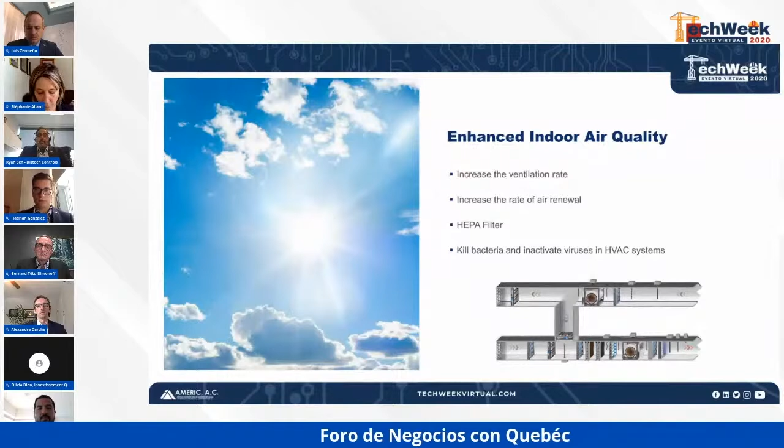Now that we know what can be done to ensure proper indoor air quality, let's see how we can manage spaces better. With the advent of remote working in the wake of the pandemic, offices shared by several employees could become the norm for open spaces, especially in cities where rent is expensive and space is scarce. Indeed, why rent, cool, and clean a space that can accommodate all employees if they're teleworking 2 or 3 days a week? However, these shared spaces represent a real challenge in terms of disinfection and cleaning.

In order to assure each employee that they are not at risk of being contaminated by the previous occupant of a shared space, room and desk presence detectors record in real time if a space or desk is occupied and allow facility managers to keep a record of occupancy over time. This lets them know the occupancy rate of the building dynamically, and allows them to prioritize a plan for offices and spaces to be disinfected first.

As we've just seen, occupancy sensors make it possible to select the spaces to be disinfected as a priority, in order to offer the healthiest and most trustworthy spaces. But once these spaces are identified, there are two methods to ensure disinfection of surfaces. The first, of course, is to use a cleaning team with the right products and methodology, who will come in to disinfect the previously occupied workspace with the appropriate detergents and germicide.

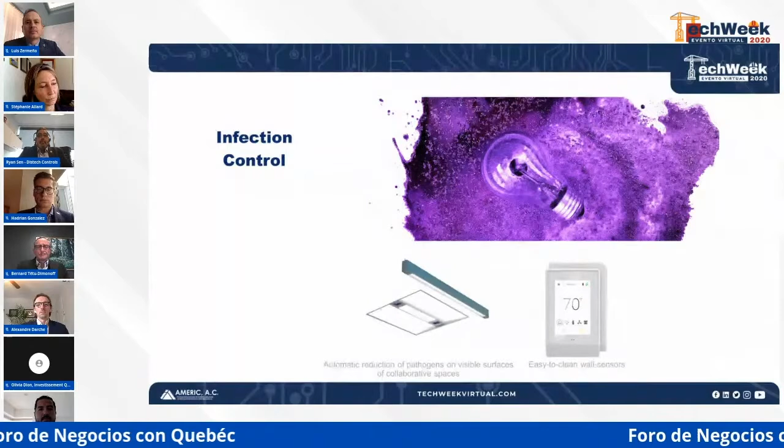When it comes to comfort management today, individuals are reluctant to touch door handles, let alone the thermostat on the wall. However, what could be more personal and trusted than your own mobile phone? With some of the latest technology available through Distech Controls, you no longer need to touch the equipment on the wall to personalize your comfort. Everything can be done securely from your personal phone.

The My Personify app from Distech, for instance, can manage all of the comfort of a room from a single application, one that's available free of charge, and includes the ability to adjust room temperature, lighting levels, sunshade position, and even allows you to select predefined scenarios, such as video projection mode in a conference or meeting room.

The My Personify Workplace app is another application available from Distech Controls, which offers all of the services to simplify the life of an office worker, such as comfort management as discussed, but also indoor positioning, wayfinding, room reservation, social networks, company news, as well as an easy-to-access catalog of services offered to the occupants in that building.

It allows you to limit and optimize travel within a building to avoid certain areas when moving from one place to another. It also makes it possible to reserve meeting rooms from an employee's phone, thus avoiding the need to touch the screen sometimes found in front of meeting rooms to reserve it for a specific time.

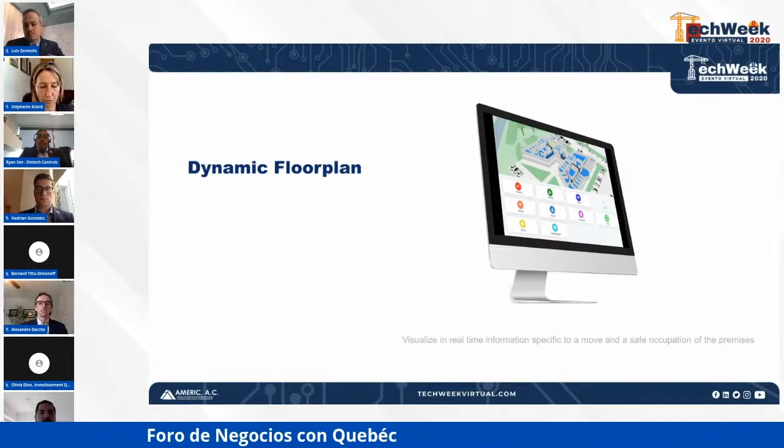And so we've looked at all of these proactive and reactive measures, and you probably ask yourself, well, has anyone actually been able to deploy these technologies in a commercial building to make them healthy and trustworthy for the occupants? In fact, Distech Controls is quite proud to support many institutional end user customers, property developers, and owners from all over the world in deploying such solutions on a daily basis.

Here you can see an assortment of projects that we've done around the globe, with many more available for reference on our website. However, in the context of the local Mexican market, I wanted to highlight a specific project executed in the region. One of our local and trusted system integrator partners, EMBA Group in Mexico, was able to assist Jabil with a key manufacturing facility of theirs in Guadalajara by deploying our technology, not only to make the facility more healthy and trustworthy, but also to provide energy savings.

Since inception, estimates show upwards of 30% savings on utility spend through local energy monitoring and verification. Due to this success, Jabil has actually entrusted the Distech technology to be deployed in 6 of their 12 facilities across Mexico to date, and are planning to retrofit the remaining facilities over the next 3 years.

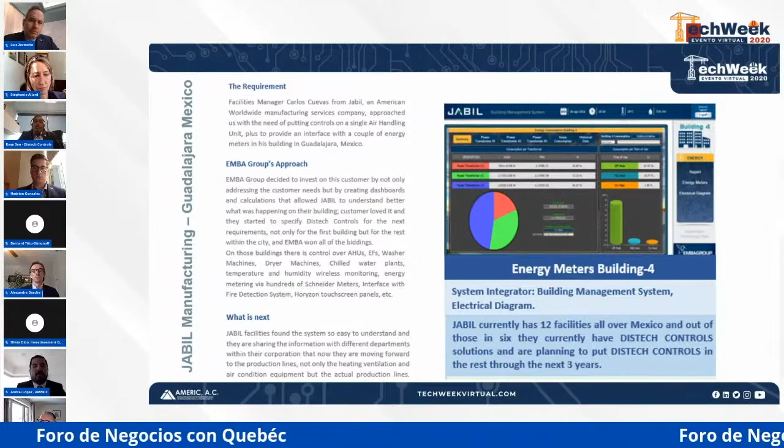If anyone's heard of the 3-30-300 rule, it dictates that on average, $3 per square foot is spent on energy in a commercial building, $30 per square foot is what it costs to rent or lease that space, and $300 per square foot is the worker productivity generated in that space.

Today, Distech's technology impacts all 3 aspects, whether it is to save on energy costs, increase asset value of the building in order to lease it for more, or to make the occupants more comfortable, i.e. using contactless comfort control, and thereby allowing workers to be more productive.

Now, the ultimate value proposition of the Distech offering today allows for end users to standardize on 4 key pillars. The first being innovative and open technology standards that allow you to future-proof your commercial buildings. Secondly, systematic project execution with competitive procurement options through our worldwide network of system integrator partners.

Thirdly, to excel at asset management with a focus on sustainability and energy analytics, allowing you to actually reduce your CapEx and OpEx costs by harnessing data and intelligent insights, as well as the power of fault detection and diagnostics, AI, artificial intelligence, machine learning, and cloud-based service platforms. And finally, to deliver a rich and unique occupant experience, including contactless solutions to the tenants and users of that space.

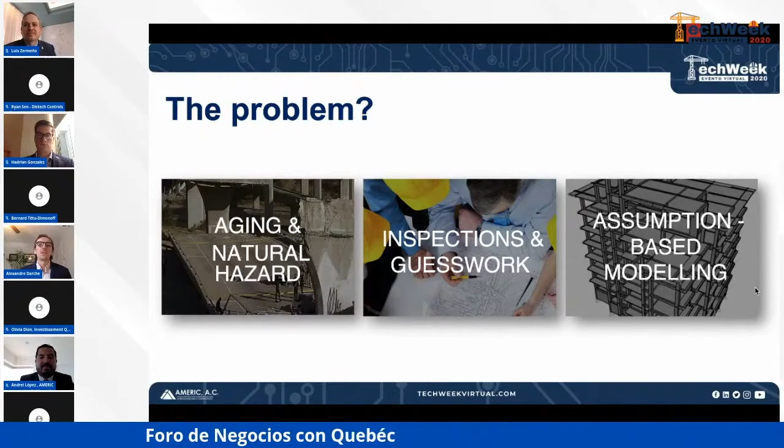When starting the company and developing these technologies, we wanted to answer a few key issues. The first being the aging infrastructure across North America - every year more bridges and buildings need to stop being used because of their age and the risk they pose to the safety of people. We wanted to find an innovative way of dealing with that, especially because the more traditional approaches for building assessment are visual inspections, looking at plans, and building assumption-based models, and we wanted to figure out a better way to deal with this. We also saw the market shifting - building owners and engineers more aware of risk than ever and getting more interested in the structural health monitoring market, installing sensors on buildings and bridges, and the market was growing every single year.

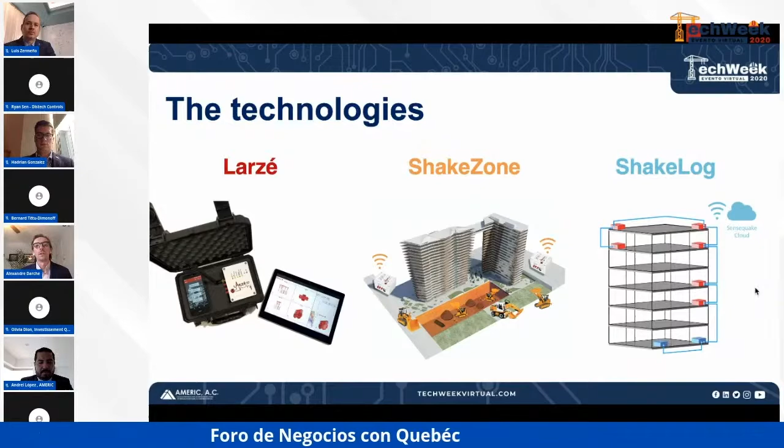What we decided to develop are 3 key technology streams to address different issues within this market. Our first is our Larzé and 3D SAM system, a combination of wireless sensors and software to extract the structural properties of a building in a few hours. Then we have our ShakeZone system for vibration monitoring near construction sites or sensitive equipment. Finally, our latest product, ShakeLog, for permanent health monitoring - a system you can leave on a structure for many years to make sure it's in good shape and that there's no hidden damage after an earthquake. Today I'll be focusing on our Larzé system and what it can offer for both engineering firms doing structural work and building owners wanting to know the seismic performance of their building.

To start, the whole system revolves around sensing data, so real information from a site. And how we do this is we collect it using these small wireless sensors. These are very easy to use, taking a half hour to an hour to learn how to operate, and essentially we move them around the structure at key points.

There's no need to drill this into any structural members. It simply sits on the floor for 15 to 20 minutes, collects the data, and can be moved somewhere else in the building. All the information from all these sensors are highly synchronized, and the sensors are very low noise.

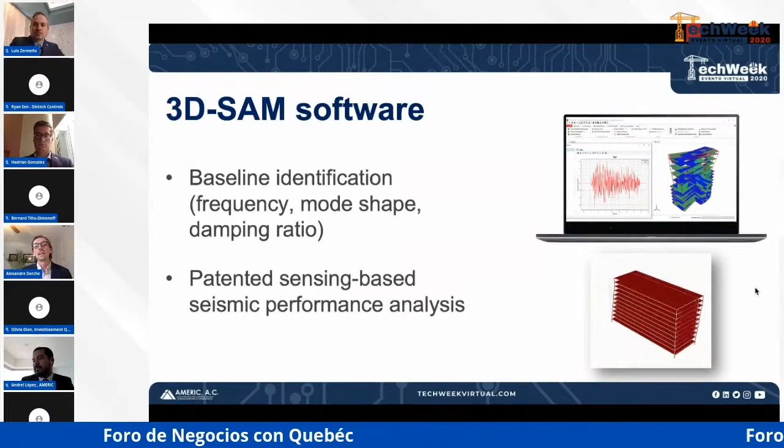So we're able to really get the raw motion and ambient vibrations of a structure. And we bring all this information into our 3D SAM software, a software we've developed internally that allows us to extract the building characteristics of the structure. This includes the frequency, mode, shape, and damping ratios. Any experienced engineer, especially in the seismic world, will know that these are key characteristics to understand the behavior of a building. On top of that, we've developed a patented seismic performance analysis method that allows us to directly get a seismic performance based on this sensing test.

So as I mentioned at the beginning, this system allows us to do both structural and seismic work. And I've picked two of our larger projects to demonstrate how both of these have been helpful in both cases.

To start with our structural applications, as I mentioned, we can do what we call a baseline analysis. This is extracting those dynamic characteristics, and it acts as a snapshot of the condition of the structure at that point in time. So we're using the building information to dictate what it is saying instead of making any assumptions. Then we have non-destructive condition assessment tests.

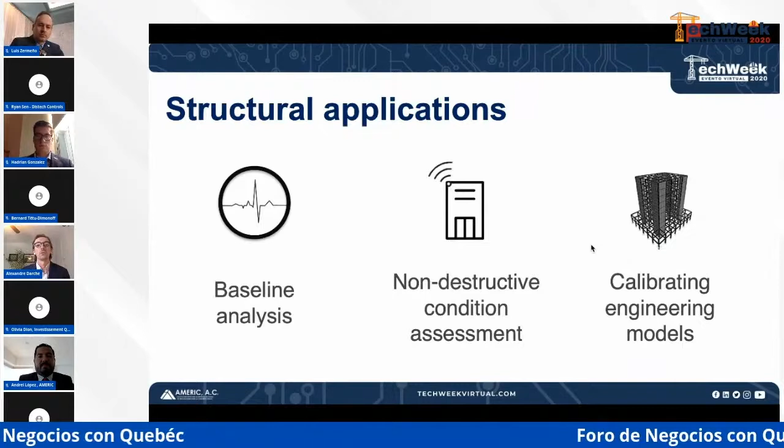These are localized tests that we can compare different building portions, different wings, different levels, and see how they react with the rest of the structure. And finally, all of this information can be brought into a more traditional engineering model in order to calibrate it and make sure that the results match up with what's happening in reality.

The workflow of this process begins with the test design. So we look at the building, we decide which key locations are the most critical to get the important information. Once we decide that, we do the on-site test. As I mentioned, it's a very easy test to do. We move the sensors around to those key locations, and a whole building can be tested in a few hours.

Then we do some data analysis using 3D SAM to extract all that information, do some comparative tests, and make sure that the structure is in good condition, and to extract the proper information. Finally, we package all this information into a report, and this report not only has the results, but an interpretation of the results.

Based on our knowledge and our experience with buildings, we're able to tell, based on the mode shapes, if there are any inconsistencies and what that might mean to the structural system. Here you can see one of our sensors deployed. As I mentioned, it's simply placed on the structural platform and takes only a few hours.

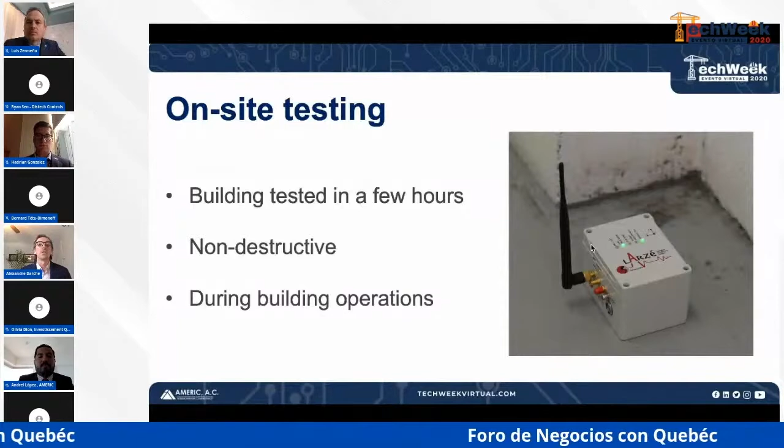One thing I should note also is that we do not need to halt any building operations. So whether it's a building, you don't need to remove everyone from the building for us to test it, or a bridge, you don't need to halt traffic. We can get the information regardless.

To demonstrate the use of this technology, I'll look at one of the projects we've worked on in Canada. This is the Parliament building in Ottawa, a very historic building and a huge landmark for the country. They're actually in the process of rehabilitating the structure, doing a seismic and structural rehabilitation. This is going to take multiple years, and they've already been working on it for many years, studying the building and getting a good game plan on how to rehabilitate it.

What we were able to do for this structure in the study phase was perform 30 different vibration tests across the structure: one global test to establish how the overall baseline of the structure is behaving, and then 29 isolated tests across the structure to see how different parts are moving, how the towers compared to the rest of the building, how different wings compared, and how different floors were behaving.

And all this took a few technicians 7 days on site to complete. What we were able to do is find 5 major issues throughout the structure that the engineering team doing the study completely missed by doing more traditional methods. At the end of the day, we were able to help them calibrate their model by 30%. So at the end of this whole process, they were in a much better place to understand the building behavior and create a much stronger and optimized retrofit of the structure.

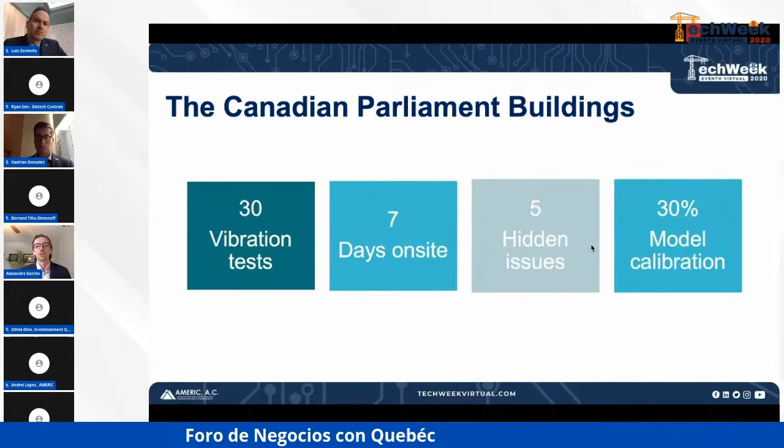Some of the major takeaways for this project was that the team was able to reduce the amount of investigations needed. In a more traditional project, you would break some walls, break some floors, and find different properties of different materials across the structure. What we were able to do was save them time and money by focusing on the different locations where we saw these inconsistencies, so they could use less investigations and get better results from them.

Not only that, but some of the inconsistencies we found wouldn't have been able to be identified through more traditional methods. And finally, as I mentioned, all this information we gathered, these reports we gave to the team, and they were able to construct a strong rehabilitation of the structure so that in the next 5 to 10 years, as the construction is going on, they're sure of the work that's being done, and there won't be any hidden surprises.

Moving on to our seismic applications. So the seismic assessment of a structure begins with that first step: a sensing test of the structure where we move the sensors around and collect the data. From there, our patented software allows us to do a seismic performance of the structure. So what will be the reaction of the building in a seismic event?

And then we do further analysis for component level. So which building objects or components are going to be more damaged? And what would that look like in terms of cost, in terms of rebuild time, etc.

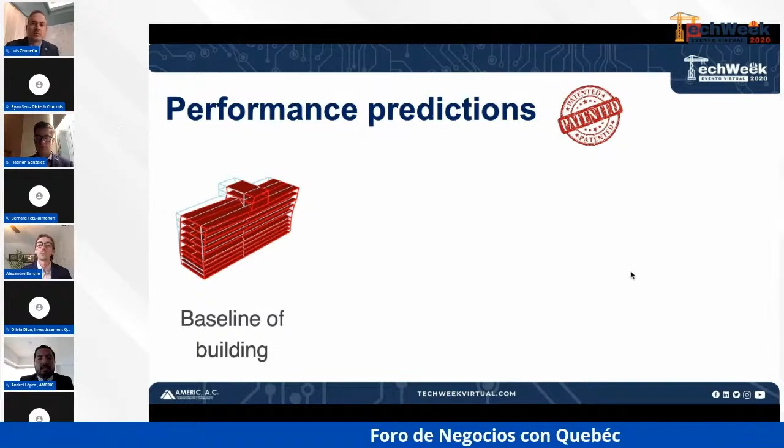And the way this goes, as I mentioned, we start with a baseline. We start with that first sensing test and those different characteristics that we extract from the structure. Then we apply ground motions based on the location, so what kind of earthquakes is this building going to experience in this process? And finally, based on our patented approach and libraries of information we have, we're able to correlate the information we received at the beginning to what the actual response of the structure will be.

How much will the building shift in the earthquake event? What kind of accelerations are you going to see at each floor, at each location on the structure? And from that, we're able to understand what the performance will be.

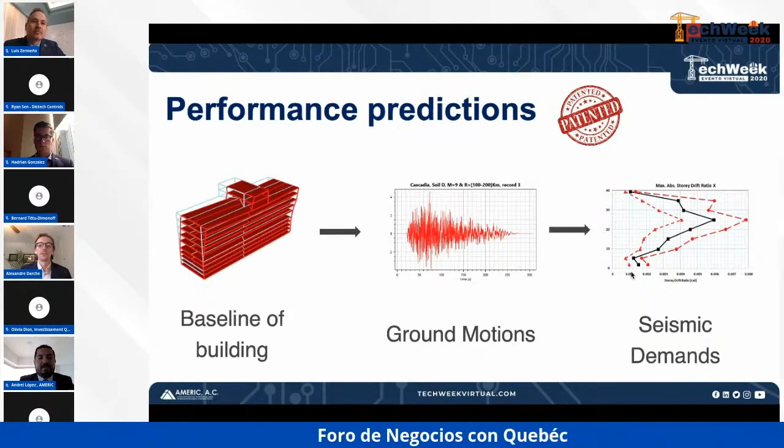We do this with HAZUS and FEMA P58, two codes that were created in the United States that compare the performance of a structure with the response. And from that, we get the performance, the component level damage, the cost of these damages, and how long it would take to repair everything and bring the structure back to its initial state.

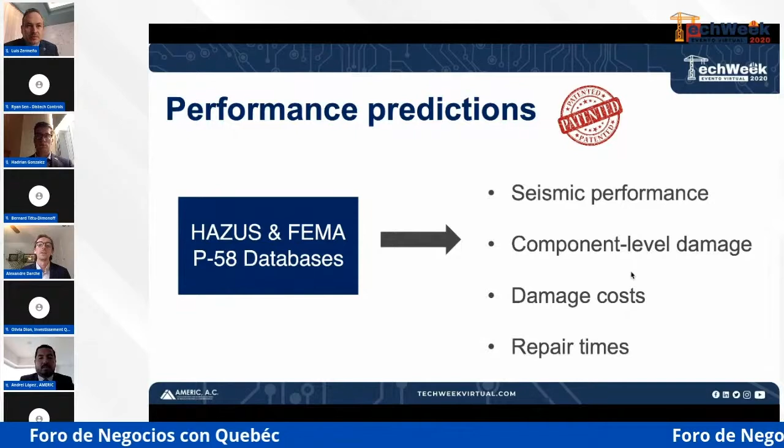So this is a very strong process that gives a lot of information. And by using a sensing test, you know that the base of the information is very strong and no hypotheses were made to get to these final results.

And a good example of this is the Canadian Supreme Court. This is another project we worked closely with the engineering team on. For starters, we did a baseline test and we were able to compare the results that we received from the site with their engineering model and help them calibrate it and explain to them a few questions they had about the structure.

As a second step, we did a seismic performance analysis. This gave us an idea of what performance we had on each floor, where the damages were going to be located, so that we could compare it to what the engineering team was getting from their more traditional approach.

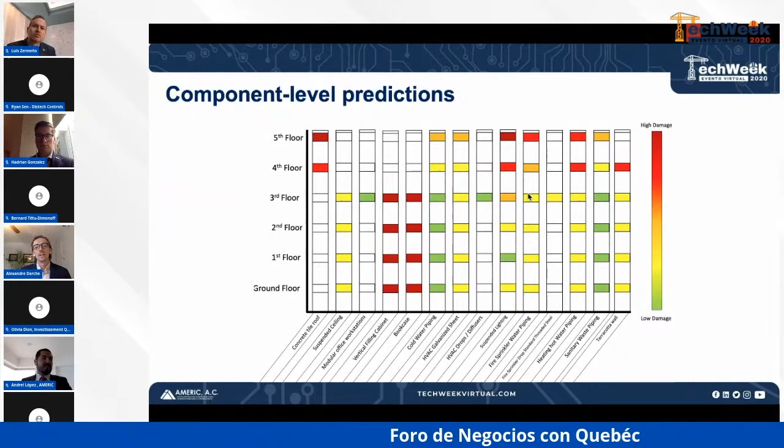So this allows a building operator and owner to know exactly where the damage is going to be concentrated and what they can do to minimize the damage. Of course, when some of these systems fail or fall off a structure, it could cause more damage at different components that might be more critical, amplifying the need for repair and the damage cost. So knowing exactly where these different issues are, a building owner is able to really fine-tune their retrofit and reduce damage costs over time.

This is a slightly different application. For another one of our clients who had multiple different buildings, since the test is very rapid and more cost efficient than a traditional building evaluation, we're able to conduct multiple tests on various buildings quickly, then present the building owner a chart like the one on the right. This chart helps a building owner with budget concerns know which buildings to retrofit first, giving them a good idea of where the risk lies and what to do about it.

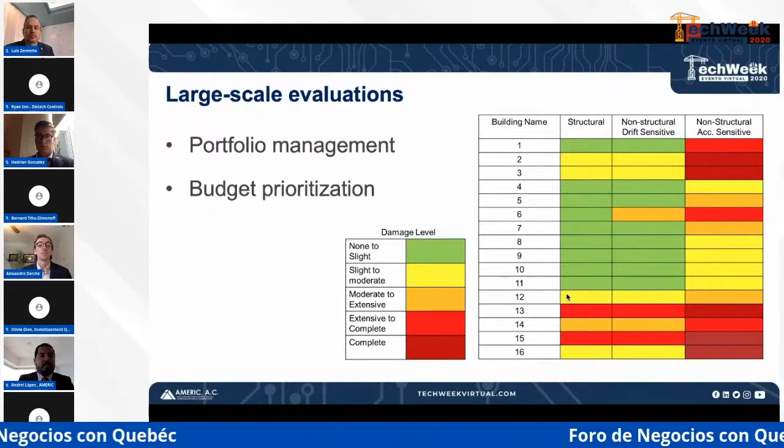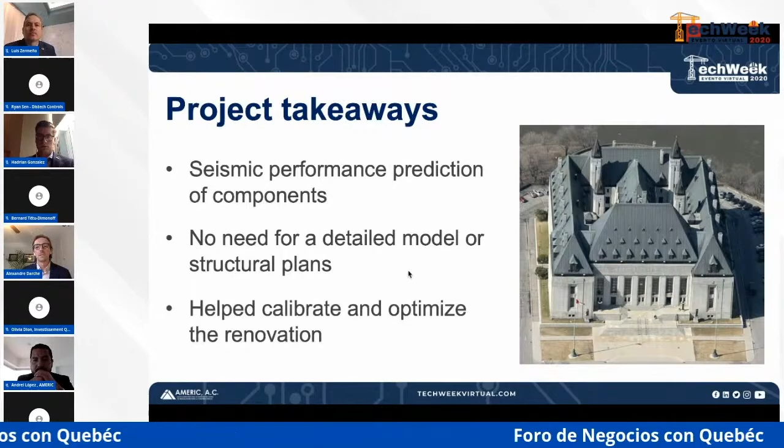Overall, the project takeaways for the Supreme Court work are that we were able to get the performance of the structure in all its components, and tell the building owner exactly where the damage was going to be, to refine the retrofit taking place. Interestingly, we didn't need to create a detailed model like in traditional engineering—no finite element model knowing all the details of columns, beams, and floors was needed. We were able to do it simply from this sensing test, and all this information helped the renovation and calibrated their model.

So to sum up the benefits of this LARSE and 3D SAM technology: first, it's based on real information. There's no guesswork, no going through old plans or finding original constructors to see if they have original plans. It's based on information from the site, and it's done rapidly. All this information in a renovation, retrofit, or repair can be used by the engineer to know exactly what needs to be done. It removes some of the guesswork, and they're able to optimize what needs to be done, save costs, and reduce over-engineering.

Before I finish, I'd like to touch on our two other technologies quickly. Here we have our Shake Zone system for vibration monitoring. This has proven very useful near construction sites, or for hospitals and other places where you might have delicate, fragile, or critical equipment. We can leave the sensors on the floor or site for multiple weeks at a time, and all the information is sent to our cloud dashboard for people to see in real time. If vibration levels pass a certain threshold, they receive emails or SMS alerts so they can act quickly and minimize damage.

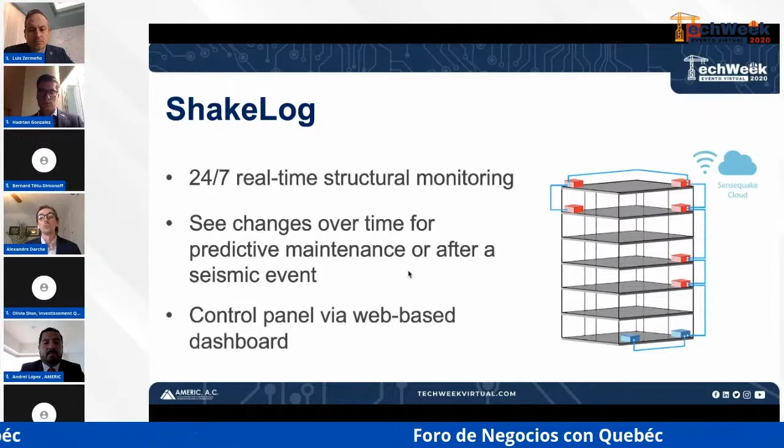Thank you, thank you, very interesting. As you know, in Mexico this is a very great market for this product. We don't know the structure in the building that we live or work in. I think it's very important. Thank you for your presentation.

Well, thank you very much. Do you already have operations in Mexico? Not yet. What we normally do in other markets is partner with a local firm, normally a structural engineering firm, and offer our services and technologies directly through these local firms. Right now we have three partners in the United States who we work closely with, who offer our services directly to their clients, expanding what they're able to normally offer from a more traditional structural engineering company.

In Mexico, we have many connections with structural engineers. In the last couple of years, Mexico made a regulation for buildings, and we're going to do an update of this regulation. We saw many things in the ecosystem, and I'd like to be in touch with you to understand your solution perfectly, because I think we can make a partnership, and also bring in the people interested and the specialists.

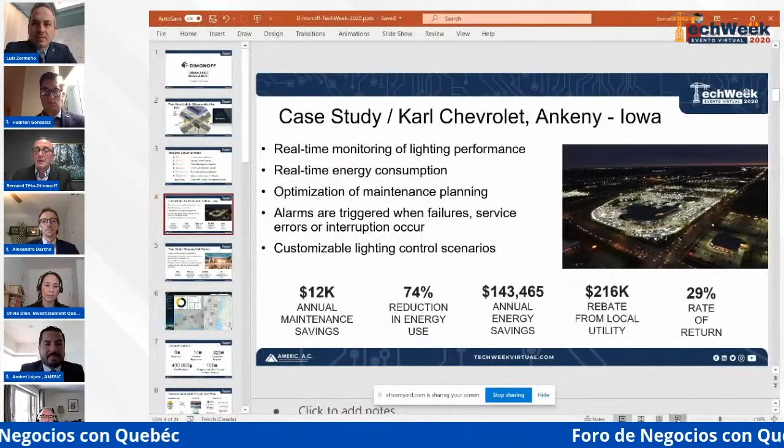Bernard, just to tell you that we don't see the screen right now. You do not see the screen. Okay, let me just make sure. This is from the beginning? Yes. Wow, okay. So we can share it. Maybe Adrian can share it for you. No, I'll do it if you want, from my side. Can you see it now? Yes, we can see it right now. Okay, thank you for telling me.

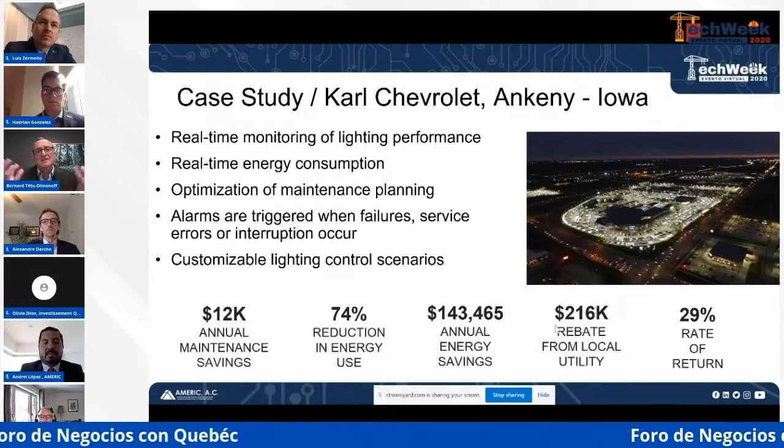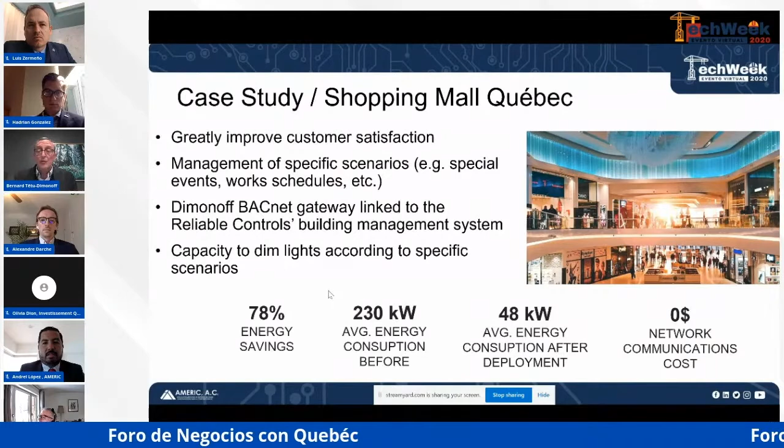This was the origins of our offering, starting with smaller sets of lighting control, realizing that we could apply it to indoor venues, shopping malls, for example, where you add smartness and intelligence to the way you control your lighting based on occupancy, level of occupancy, and/or presence, and so on.

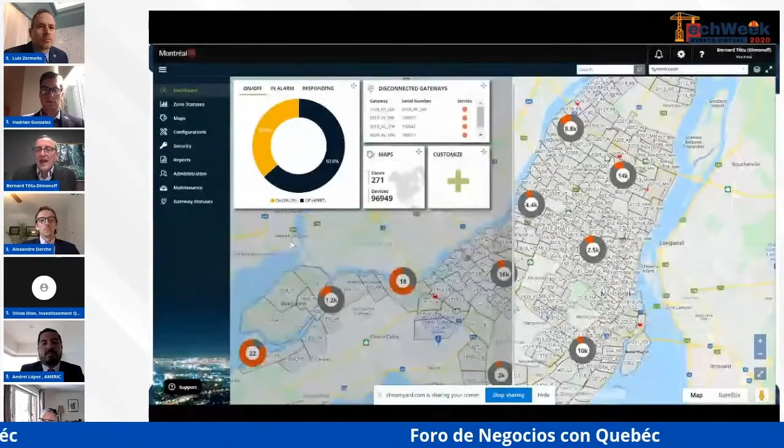And definitely optimized processes for the maintenance. So when we talk about controls, typically people see energy saving, and as you may know, Quebec is famous for its hydroelectricity - we can create electricity very, very cheap. But, we still have very nice savings just in street lighting.

One of the best saving elements of the whole story is really from the maintenance. You don't have people running around the streets at night, two guys in a pickup truck trying to figure out where the problems are - the problems 15 seconds after they happen. The other very important aspect is we use street lighting for security purposes. So very, very quickly, we can now take care of the maintenance aspects and do it on a humongous scale.

So our footprint - we've covered projects in 6 countries. A few of them are in Mexico, near the city of Leon, where there's a long stretch of highways. We've been around for almost 15 years now, completed very close to 340 projects. The product is designed and manufactured in Canada, but this is one of the messages I wanted to deliver during this presentation.

As we say, we're open for business, teaming up with a local presence in Mexico, and this kind of technology can definitely be also manufactured with a Mexican partner. I think this is really important, that it becomes a win-win situation.

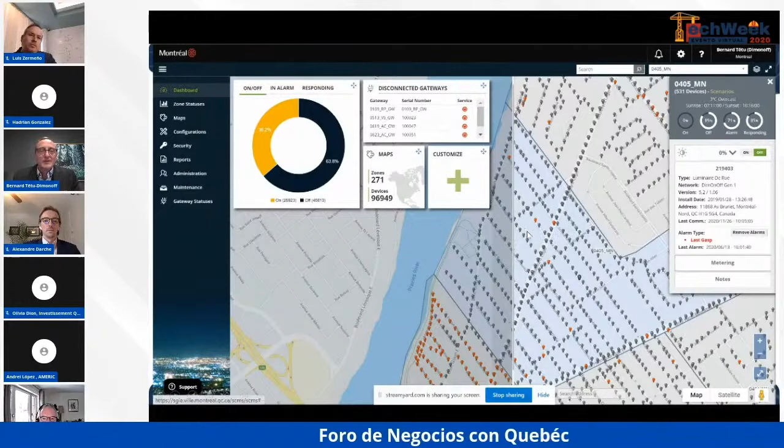One of the ways we've been using this is also to create a platform where you not only serve one city at a time, but you can actually serve hundreds of smaller towns and villages and manage the system through an ESCO, an energy service company, or an engineering firm, or an electrical firm. So this week with Olivia and Hadrian, we were talking to a company that is local in Mexico, and we're looking for a partner to actually manage those deployments.

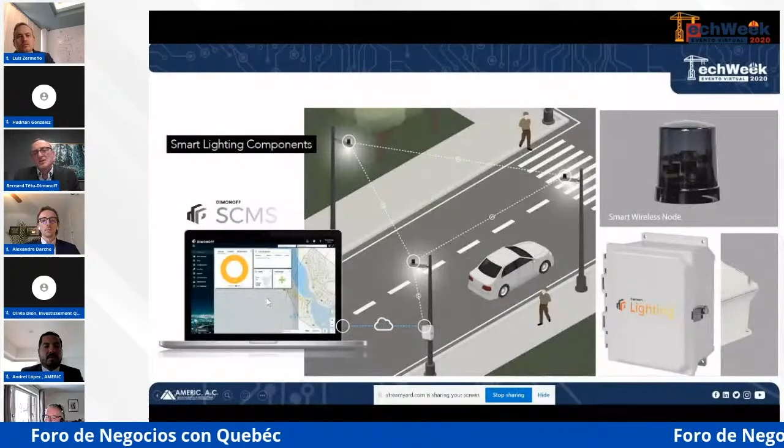So what does it look like? We use a wireless mesh network. The little streetlight sensors that you can see on the top right are actually installed on every single streetlight. They mesh together, they talk to each other, they create a very rugged network of telecommunication, and they end up talking to a gateway, which is connected through the internet to a server, and then the users connect to the platform using web browsers.

So you can be anywhere in the world and monitor things. Why do we do that? I mentioned it, energy saving is one element. Another very important element is the maintenance and ensuring security with lighting.

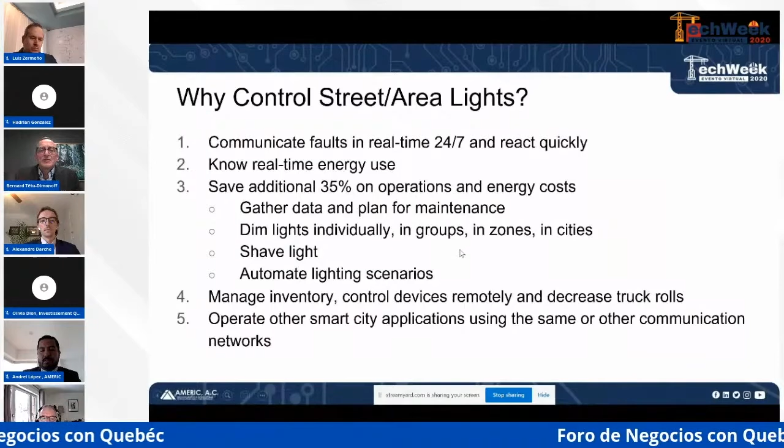There are little hardware pieces that you can put on top of streetlights or inside decorative streetlights, or even go as far as solar power devices.

Communication - one of the drawbacks or stumbling blocks of IoT is the confusion in various proprietary protocols, networks and security. So we just decided to embrace many different protocols and stick to the highest standards of security. And for those who are in building management, it's also compatible with BACnet IP.

And then from this network, we started solving problems with the mobility of large cities. One of the things that creates the most problems for traffic in the morning and at night is the parking lots.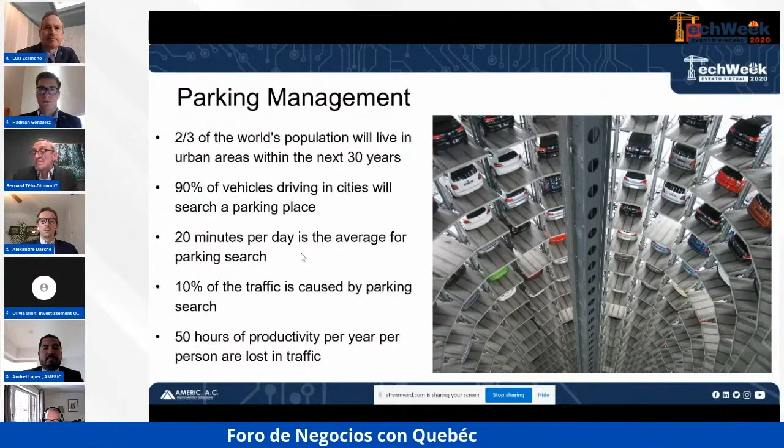Note that those sensors actually share the exact same network - I'm talking about the network that sits on the streetlights. You can build proprietary systems or a closed system for each application, but if a city decides to make it part of the grand scheme of things, it shares the exact same communication infrastructure.

I will skip this, but as you can see, the identification of free parking spaces, identification of available spaces and statistics - from that information you have real-time availability, you build statistics, you can improve your process, etc., up to the point of optimizing the cost per period of the day in those parking decks.

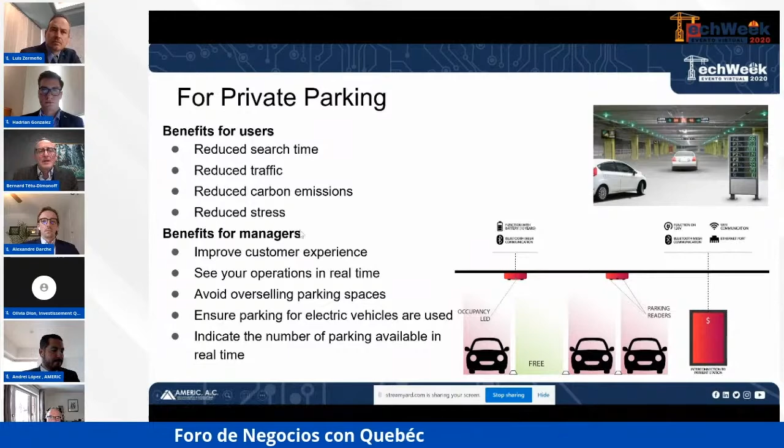Dimonoff also has, and I mentioned, we're talking business - Dimonoff has a division where we design electronics. So this is a real case.

We've teamed up with a company that does the design of first-class entertainment systems in Airbus planes. So we design part of that system, and that basically is all about IoT.

So Dimonoff has this division for hardware development with a strong qualification in Linux operating systems and distribution tools, so Yocto and Wind River and so on, and design of cloud and web platforms. So as you've seen in the system...

Sometimes the challenges are to scale things to the reality of big deployments. And obviously firmware development, because we design hardware. Hardware nowadays is a mix of hardware things but with a lot of smart design in them, and this is how we've grown.

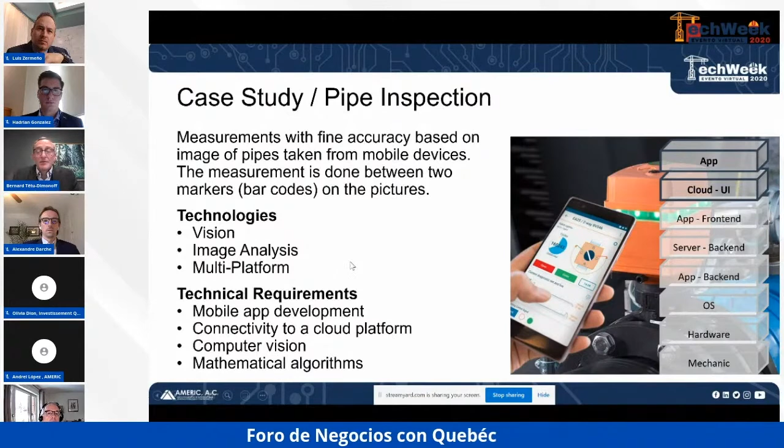So one example is this Swiss company - they're in pipeline inspection, non-destructive testing. For a few years now we've been constantly developing from the mobile apps to the hardware for pipeline expansion joint processes or monitoring processes.

To this company that does power distribution units - so if I have a clear message, it is that we are actively looking for partners in Mexico. I had the opportunity many years ago to have a company in Mexico City, and we would very much like to find this partner to bring our technology and roll out smart city applications and IoT in your part of the world.

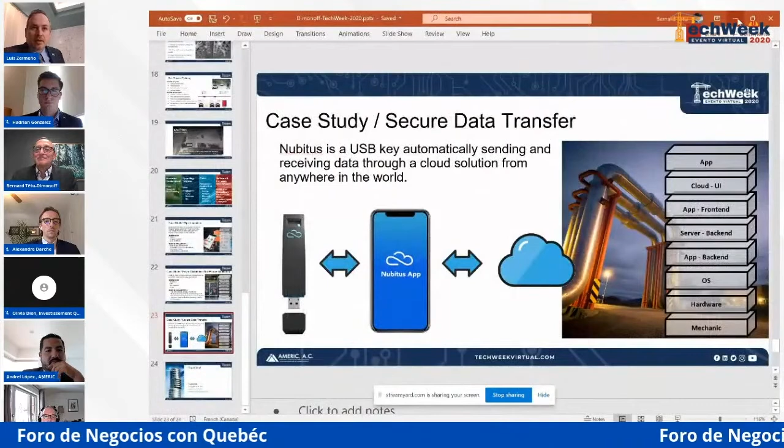Thank you, Bernard. I saw something about Mexicali City. Mexicali City is in the north of our country, on the border of the United States and Mexico. Did you do something in that city?

No, we did something near Leon. There's a city called San Francisco del Rincón, if I can remember. And that project was a very long stretch of highway.

And they were doing the street lighting conversion to LED. It's always the best moment, because you switch from sodium lighting to this new type of lighting while you're installing with a bucket truck - perfect timing, there's not going to be two different installation times.

So all you have to do is literally twist it, and voila, the installation is like 10 seconds per streetlight.

And once you've done that, the network self-establishes and we start talking to things.